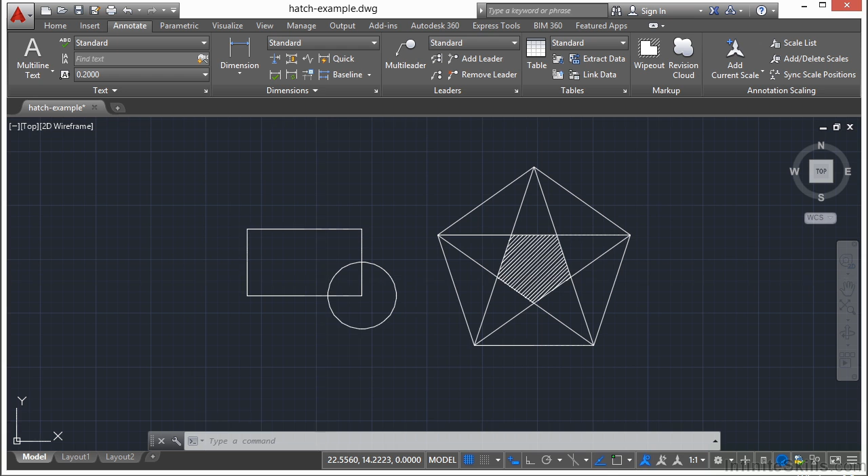Type in the word hatch, type in the letter H, go to the Home tab on the ribbon, and come up to the hatch command right here. Now you'll see here there's a little arrow, and we have three different types of hatches. We have hatch, gradient, and then we have a boundary.

Now the boundary doesn't create a hatch, it just creates a boundary that's very similar to a hatch boundary, and they're created almost identical. So that's why it's grouped here.

If you click the hatch command, this will give you a contextual ribbon tab. This is the hatch creation ribbon tab. Here you can pick your different patterns.

You can see them on the screen here. You can scroll through them. If you click that arrow here, that shows you everything that's available to you. You get to some of your gradient fills and other patterns.

Some of these are ANSI or ISO standards. Others are typical drafting standard type hatch patterns that show material, etc. And you also have a solid fill pattern here as well.

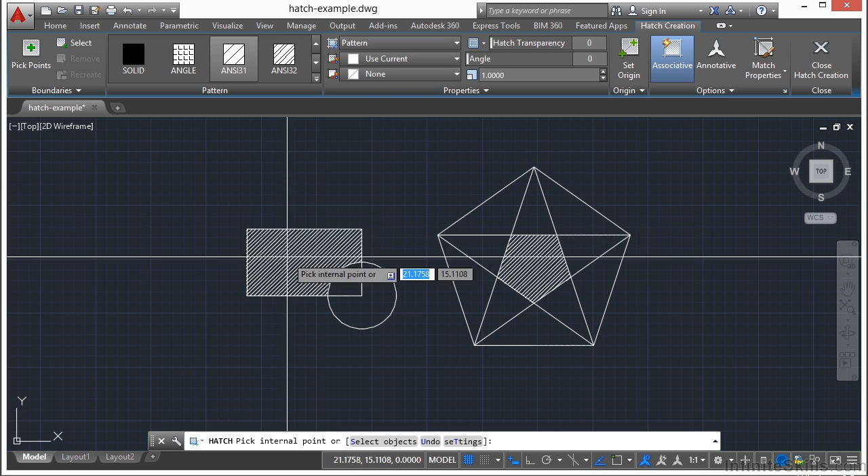So you pick your pattern and you can define what area gets hatched in one of two ways. One, you just pick your points and it looks for a boundary and it fills everything inside that boundary. As you move your cursor over one of these areas, it will give you a preview of what's going to be hatched and what it's going to look like.

Or you can use the select option and select the entire rectangle. And you see here, it automatically created this with island detection because I started it and went back to it and continued with it, and it thought I was giving it multiple options.

So if I press escape, select the hatch, right click, and erase that, I'll show you how it's going to look. Start the hatch command, start with the select option and pick the rectangle. It will ignore the lines inside there.

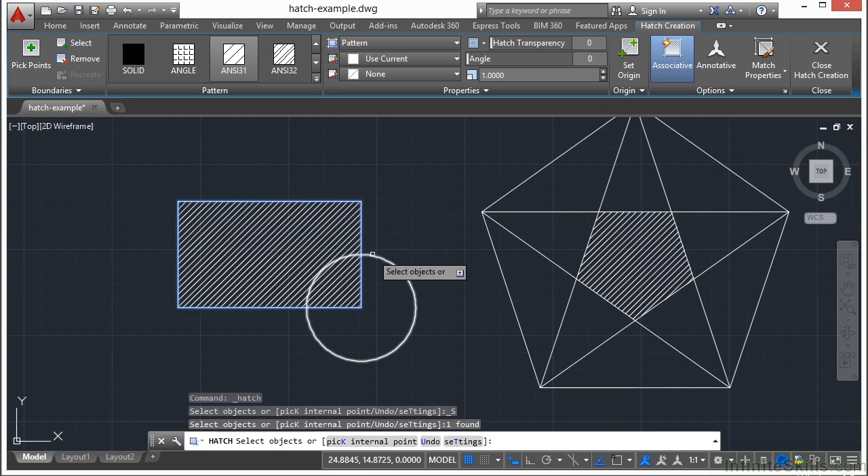Otherwise, if you use the pick points, it has what's called island detection. So it's sort of like dropping in a drop of water and it just flows around until it finds a border and then it stops. Now hatches are cool because I can edit them in a lot of different ways.

I can trim them, start the trim command, select the cutting edge that you're going to use, press enter, and then select the part of the hatch that you want to go away.

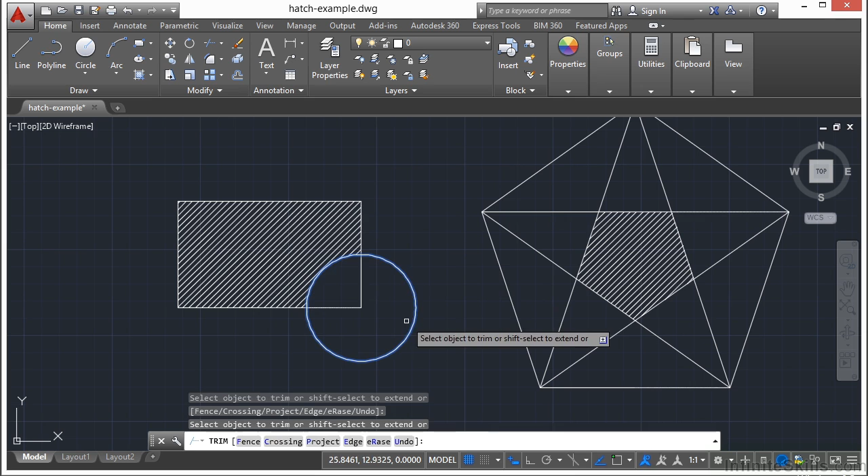That's really cool. Also, if I select the hatch, I can move them like so. And you can see here I have grips that I can also change the boundaries just like I would with a polyline.

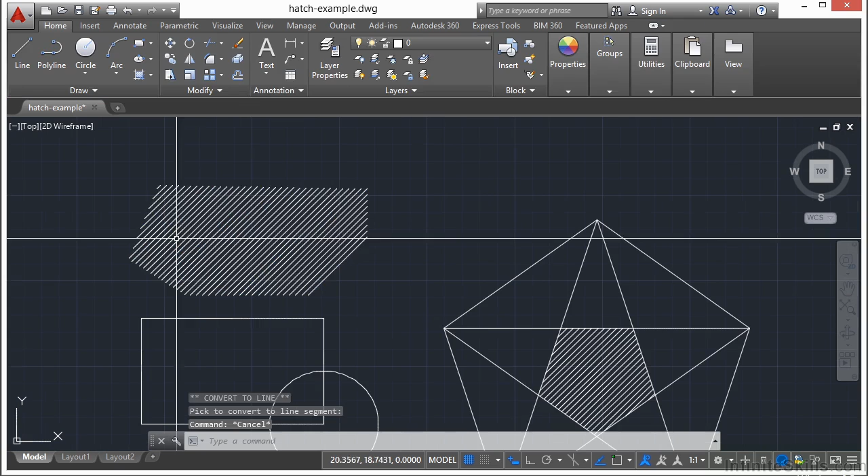So I have a lot of different options. If I select a hatch object, the contextual ribbon tab of the hatch editor will come up. It looks almost identical to the hatch creation. Here I can change my patterns.

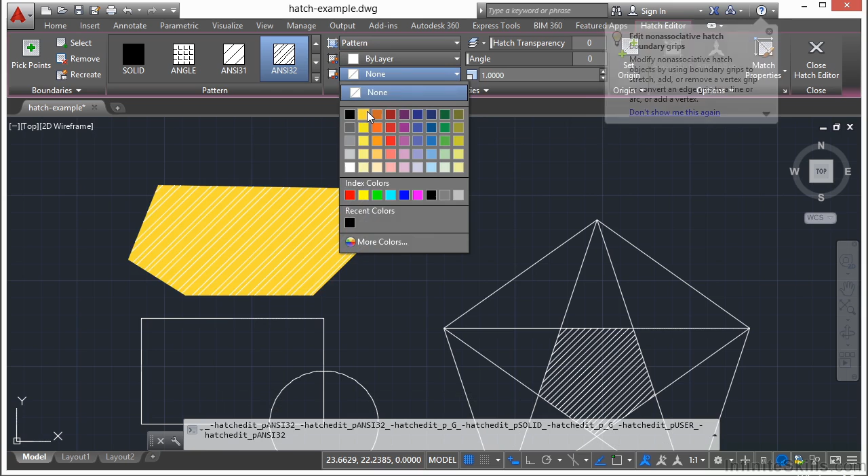I can even change it here as well to a solid, a gradient, or a user defined. I can change my colors. I can change a background color. I can change the angle. I have the slider bar, or I can just type in the angle here.

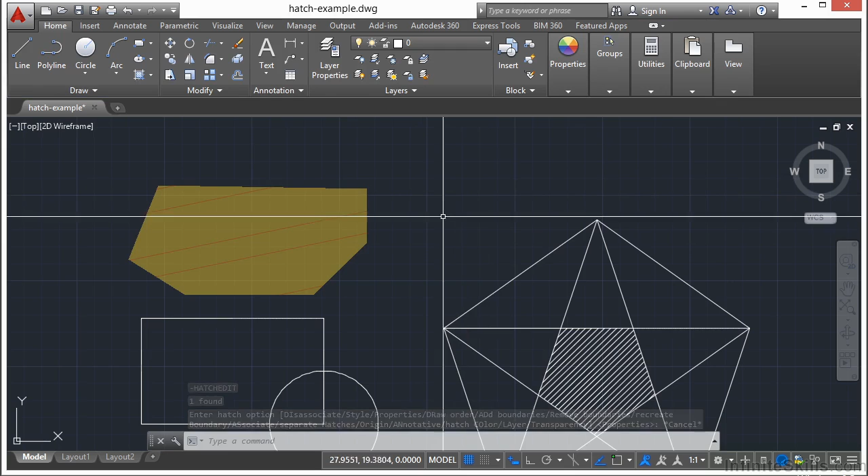I can make the hatch a little transparent, and I can change the scale. When you're done, press escape. If you press enter, you're going to get that little menu bar and just press escape. So you can see here, you can make your hatch patterns look really quite cool.

Now, if I select this here, and I change it from a pattern and I go to a solid, it will retain some of these other settings, but then I can just change the color to whatever it is I want it to be. And again, the sides and everything just edit the exact same way.

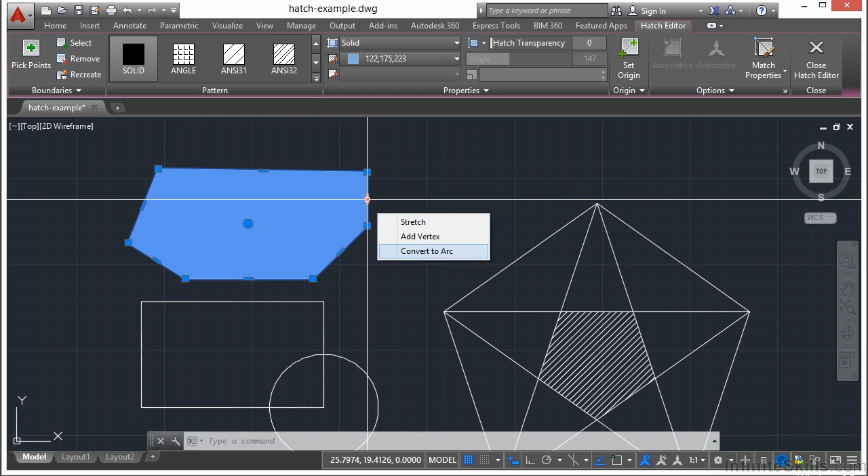If I switch it to a gradient fill, I have these different options here. And I can change the color of my gradient. I can change the different styles of gradients.

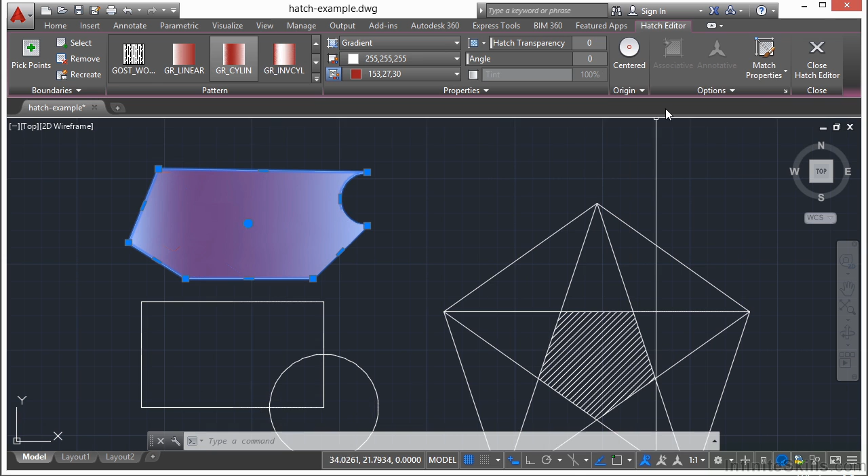And there's a lot that I can do with that. I can change the origin. And I can use match properties.

If I choose the match properties option, find another hatch pattern, select it, my new hatch pattern that I'm creating or editing will match the exact same properties of that hatch object itself.

So if I go with the hatch command and I pick select, I can select an entire border like that, or I can select a defined shape of items. Now, it's going to give you some trouble if those shapes don't break and cut exactly to themselves, as you can see here.

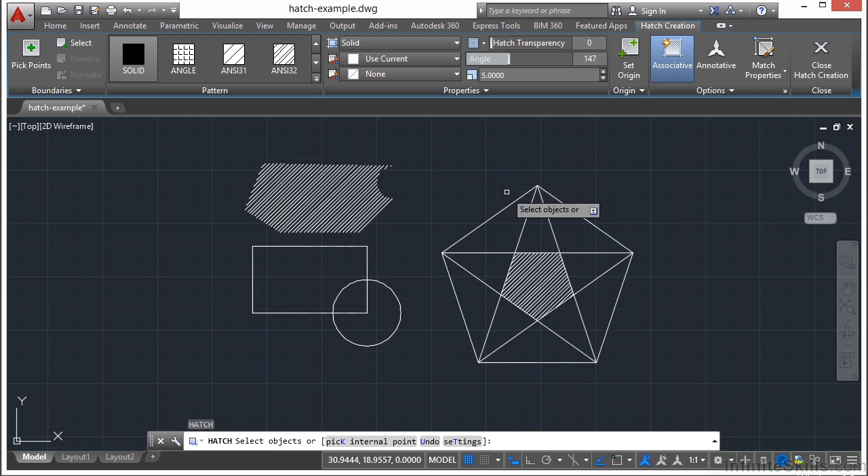So now that I have those lines, and I start my hatch command, I can pick these very specific lines and hatch just that object or item that way.

So how a hatch object is created, it depends on what you select, or if you just pick an internal point. Look out for island detection, that sort of thing.

So hatches are really cool. They can really enhance your drawing visually, and there's a lot that you can do with them to edit them and to make them just amazing.